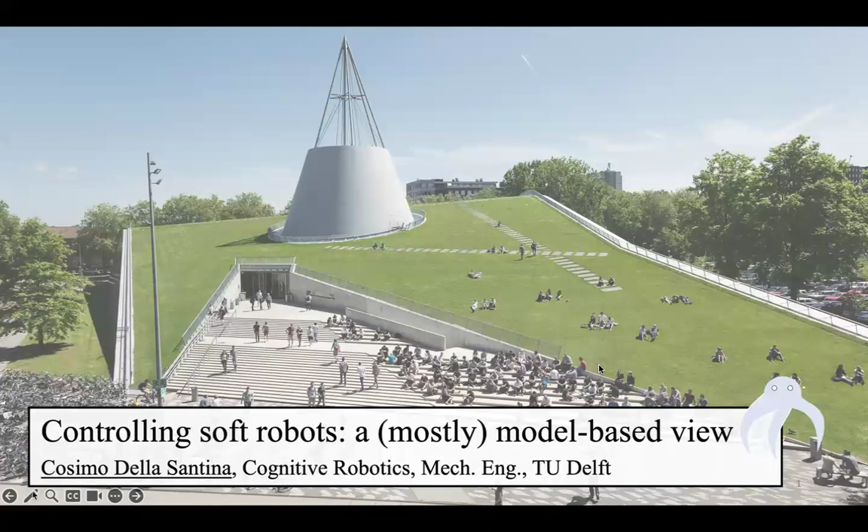This week it is a great pleasure to have with us Professor Cosimo Della Santina, who is an assistant professor at TU Delft and also a guest scientist at the German Aerospace Center, also known as DLR. Something about Cosimo: Cosimo got his PhD in robotics from the University of Pisa, and then he was a visiting PhD student and postdoc at MIT's Computer Science and Artificial Intelligence Lab.

And also he spent some time as a postdoc and a guest lecturer at the Department of Informatics at the Technical University of Munich. Cosimo leads a lab at TU Delft, which focuses on the study of embodied and disembodied intelligence in physical systems. And the emphasis of the group is on elastic and soft robots.

As you've seen from the bio I shared, he has won a number of awards. I will not list all of them. Maybe the most recent is the 2023 IEEE Early Career Award in Robotics and Automation. And he's part of many exciting initiatives in the Netherlands.

Today he's going to talk about controlling soft robots, a mostly model-based view. And I'm very excited to hear more about this subject and to have this subject covered in this Autonomy Talks series. So without further ado, Cosimo, whenever you're ready, go ahead. The stage is yours.

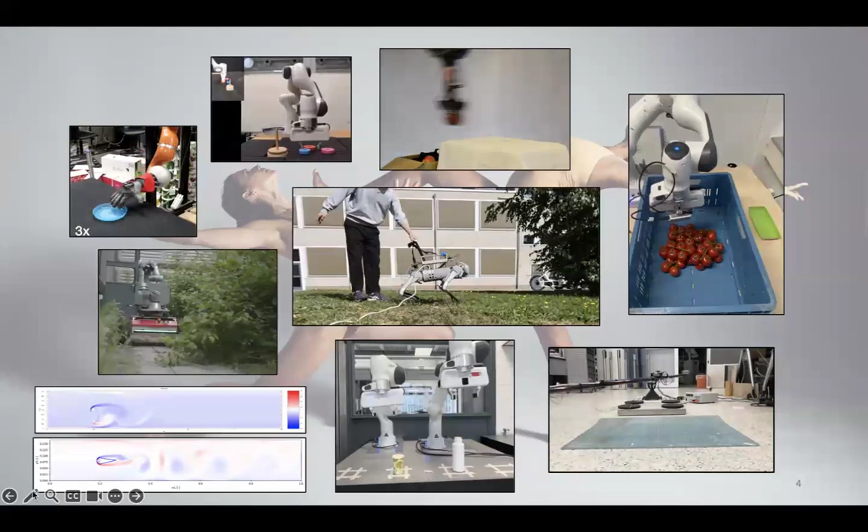they are usually high dimensional, and they have some kind of rich or useful autonomous behavior, autonomous evolution, which is one of the ways you can describe or quantify this idea of embodied intelligence. And in terms of applications, this goes all over the spectrum, more or less. These are some videos taken more or less randomly from works that we do. This one has not started. Yes, that I will not be showing today.

In terms of application, indeed, our activities cluster around these three macro topics: robotic hands, grasping and manipulation, soft robotics, and elastic and soft quadrupeds and efficient locomotion. And today I'm going to talk mostly about soft robotics.

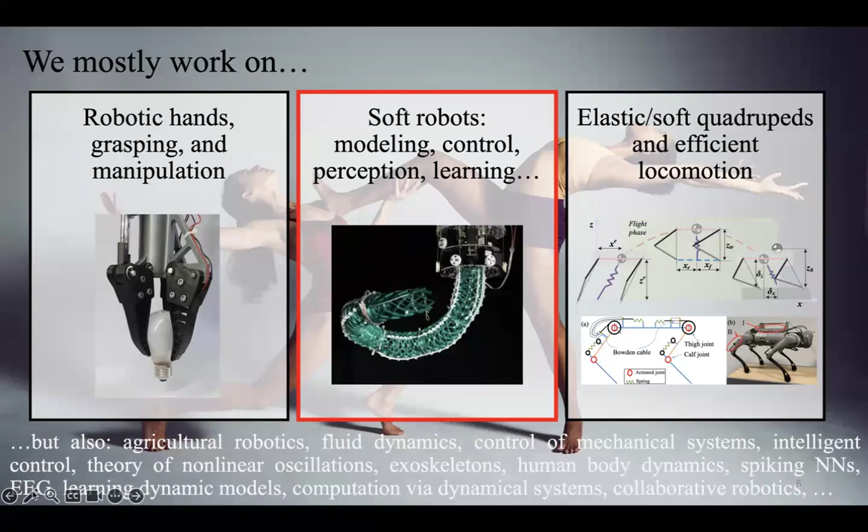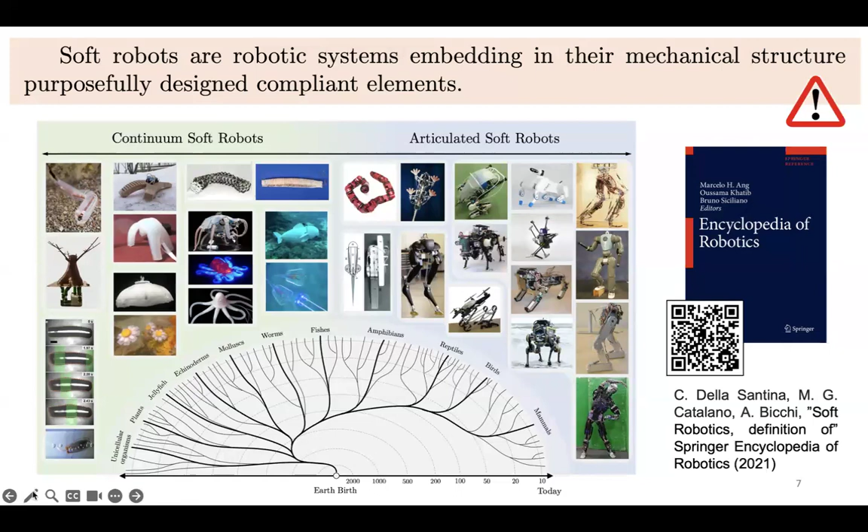And what soft robotics means is kind of a debated topic. This is a definition that I gave together with Manuel Catalano and Antonio Bicchi. So since I gave it, it is the one that I like the most, or at least I liked it at the time in which I gave it.

I will implicitly refer to soft robots as this left half of the spectrum, which is continuum soft robots. And these are robots inspired mostly by invertebrate animals, whose body is composed to a good extent of continuously deformable materials.

And over the years it has been quite an active research area. This is a topic that has its roots in the 80s, but it had quite a steep increase of interest in the past, let's say, 10 years, with a lot of hardware platforms being developed, and you can see just some random collection of them here, mostly from others' labs.

And the goal in all these cases is to hopefully get closer to the kind of intelligence which is most common in nature. So, as we all know, robots have been for many years much more precise than humans or other animals in performing tasks, but still animals are more robust in interactions, safer, and compliant. They can be both precise and compliant.

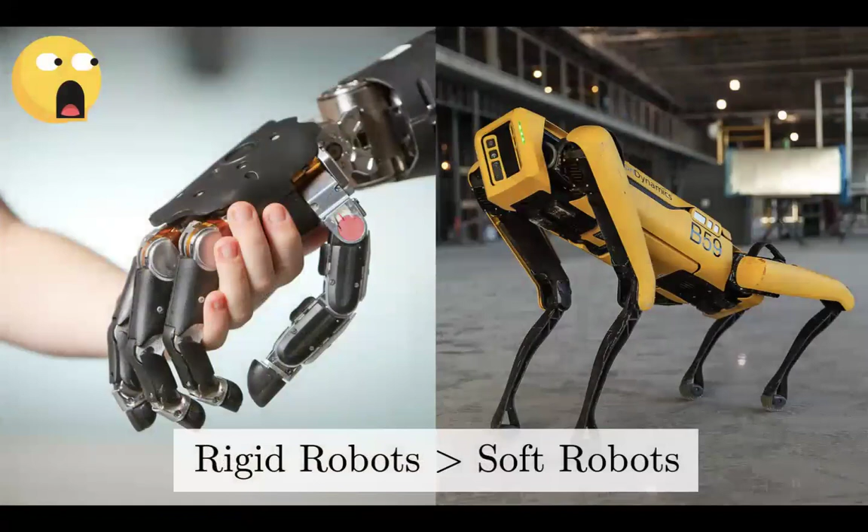So for interaction tasks, robustness, inspection tasks, soft robots should be the way to go. But if you look at what happens in reality, for several reasons rigid robots still outperform soft robots in the very tasks for which soft robots have been developed. So interaction and inspection.

And there are many reasons for that. Everyone has their favorite reason. My favorite reason is motor intelligence. So the lack of an efficient and effective enough low-level brain for this kind of artificial creature, some way of making sense of their own bodies and controlling them to perform actions.

So we look into this with our group, and I will briefly discuss our general view on the topic. But before starting to lay it down, I want to clarify that the way in which we look at this is really a kind of very classical, in a sense, control theory point of view.

So we really started from the theoretical foundation, then tried to build new algorithms upon them, and then in the end new functionalities upon them to really give soft robots intelligence. And now I finally have videos of experiments to show, but this came only after a few years of intense research, more on the theoretical side.

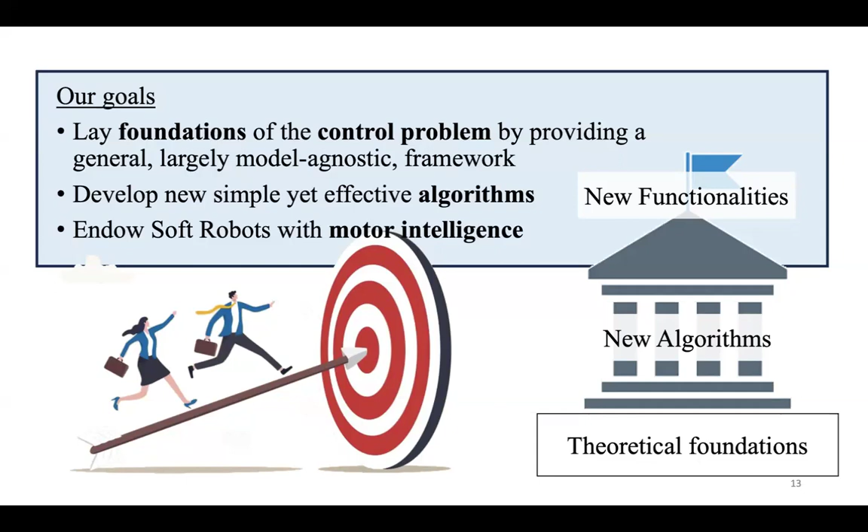Myself, I'm not an expert in modeling, and I will not say that our core expertise is modeling. But what I find particularly interesting is trying to figure out the structures of these models. So not necessarily come up with the most accurate models, but really dig into their mathematical structure and understand what the commonalities are among all the different already existing techniques to discretize these systems.

So why is modeling hard? It's hard for several reasons, but there is a core fundamental reason: if you have a soft robot like the one that you see in this video, and you want to just tell where the robot is at a given instant, you need at least to specify a complete function, the spatial curve that defines the position and orientation of each point of the backbone of this robot.

So this is a function that evolves in time. This means that, at least in theory, you should be using a partial differential equation to model this system, which is very hard to deal with. And this is something that we don't like, especially from the control point of view, since the theory on them is relatively limited.

So what we like the most is to do some kind of space discretization, done in such a way that you end up with ordinary differential equations in a structure that we are used to play with as people working on control of mechanical systems or robots.

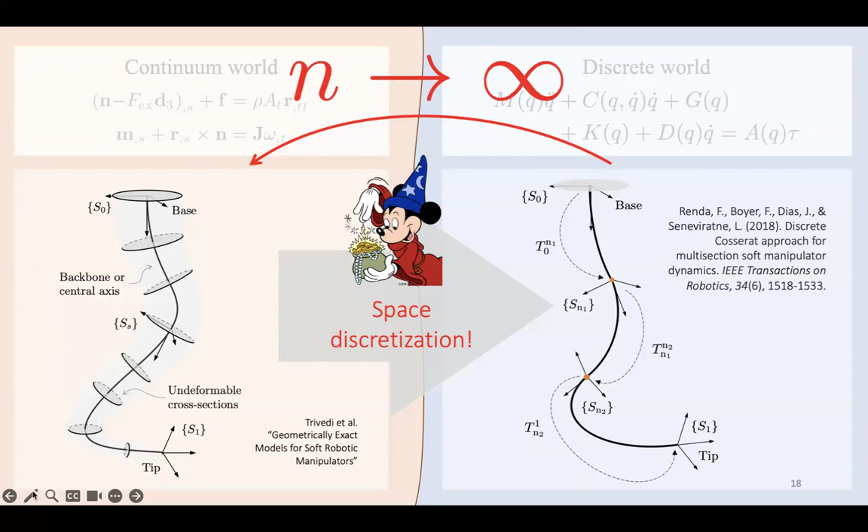And the key point of this space discretization should be that if you take the order of this discretization to infinity, making it infinitely fine, then you should recover the original system, because in this way you get at least some kind of weak proof of convergence on the original infinite dimensional case, if you prove things on the finite dimensional case.

So, control-oriented models, derivation in a tiny nutshell. What are these kinds of models? In the end, coming up with such models can be, to the bone, described in 2 steps. The first one, which is a key step, is to define your knobs. Let's consider, for example, the shape of this soft robot, which is this thing here.

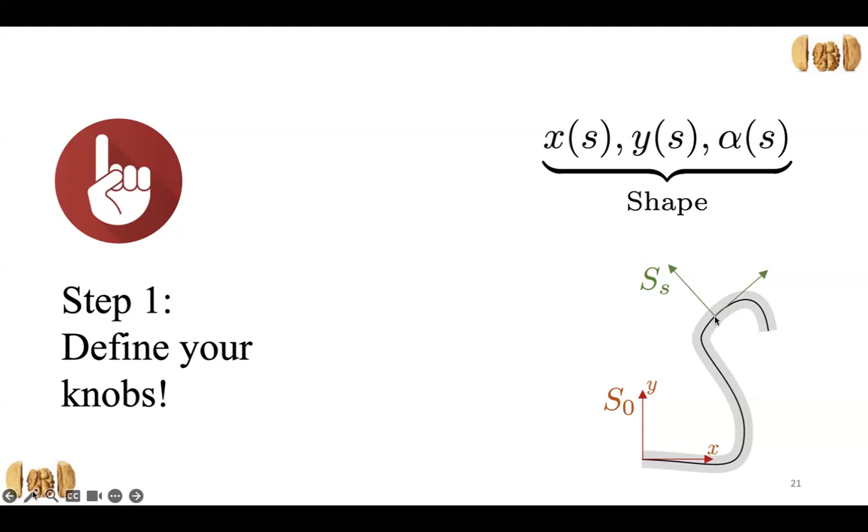Already if the soft robot is forced to move on a plane, so 2-dimensional space, you have a function whose domain is 0 to 1, because this is the local coordinate. And then for each point S, you have to specify X, Y, and alpha, the whole position and orientation of each point. So these are 3 functions that specify the shape of this thing.

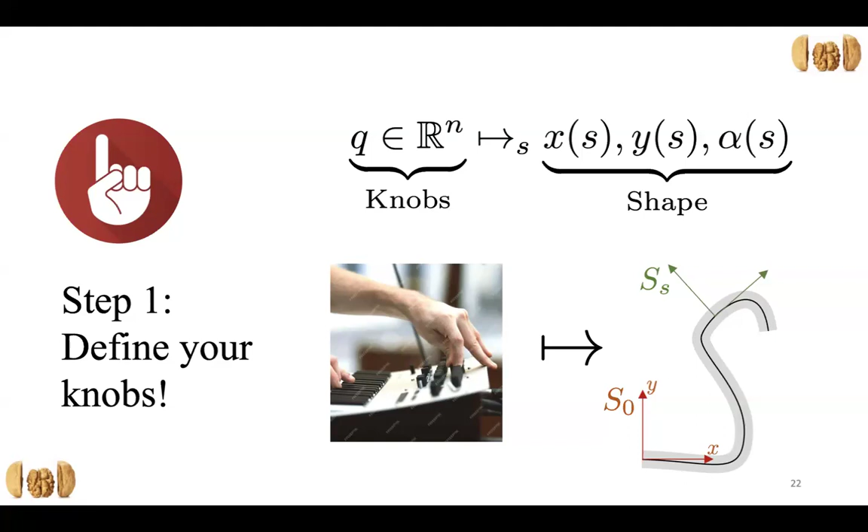What you need to do is to come up with a mapping between a finite dimensional amount of variables that you move, and if you move these variables, this will define movements in infinite dimensional shapes. And this is really where all the art is. Defining this kind of forward kinematics is the art, because it's where the expert intuition enters. And I will show in a second a few examples of these.

But once you have these knobs, you have ways in which your robot can move, and associated movement of mass, and then you can just use a, quote-unquote, standard Lagrangian machinery to come up with your ordinary differential equations. These are going to be equations that describe the evolution in time of these knobs, not of the infinite dimensional system.

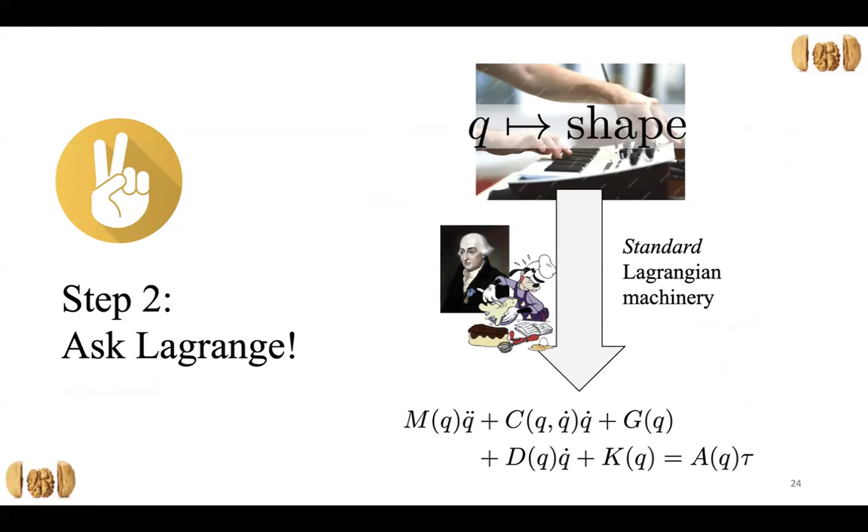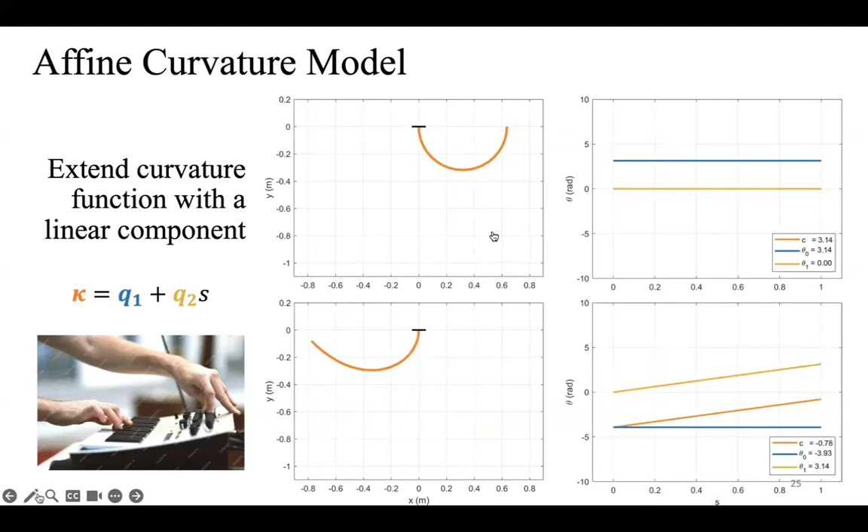And you can see that with just 2 degrees of freedom, you can obtain quite complex shapes. And this one on top, we are keeping Q2 equal to 0. We are changing Q1, and this is called the constant curvature segment. And this kind of constant curvature segment actually is grounded in much more classic ideas, which is called the piecewise constant curvature model.

And here the knobs are again, you are looking at your soft robot as an interconnection of circles with constant length, but with variable curvatures that are variable in time, but constant in space. So each knob is associated to the local curvature, which means the inverse of the radius of each of these local circles here.

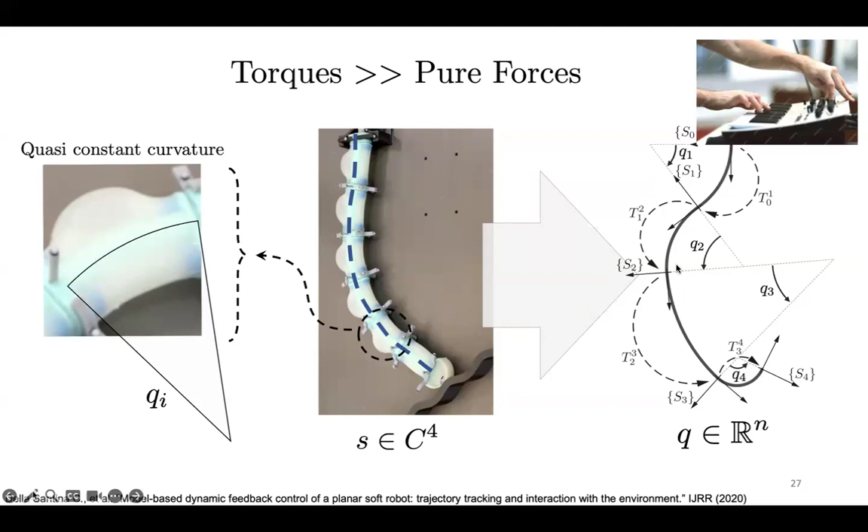And this works particularly well, for some reasons that I will not go into, to describe systems that are made by interconnecting actuators, so soft actuators. You can see it here. The core idea: you have this soft robot, and you can identify parts in which the shape will more or less look like an arc of a circle, and then you just combine these. And again, with each knob, you are going to change this angle here.

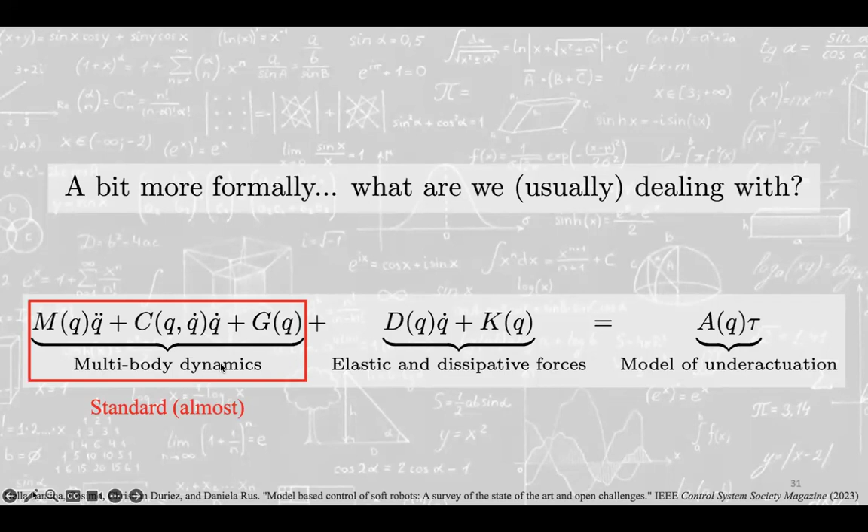So, a bit more formally, since I see it's already 15 minutes that I'm speaking, what we are more usually dealing with are these kinds of ordinary differential equations, where you can identify 3 blocks of terms. One first block is more or less standard. If you have been working on control, or looked into control of a mechanical system in the past, or a classic robotic system, this is what you usually have. What you have inside for a soft robot is different, but the structure of the equation is the same.

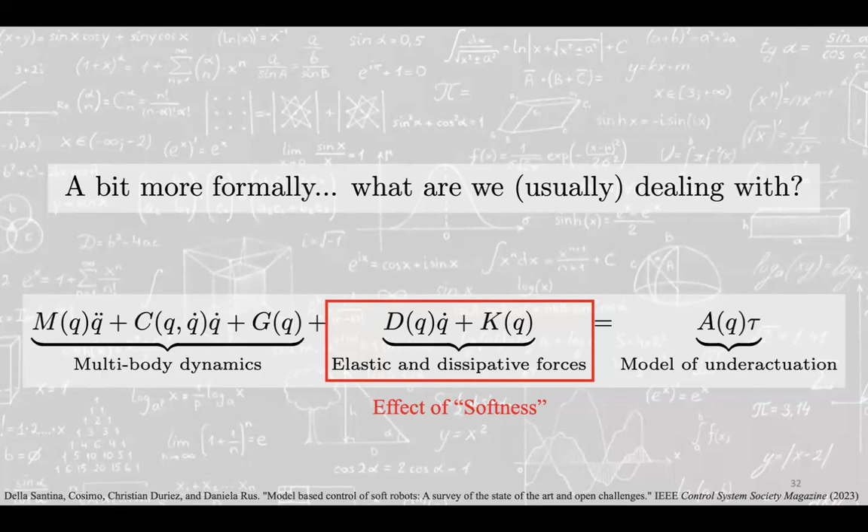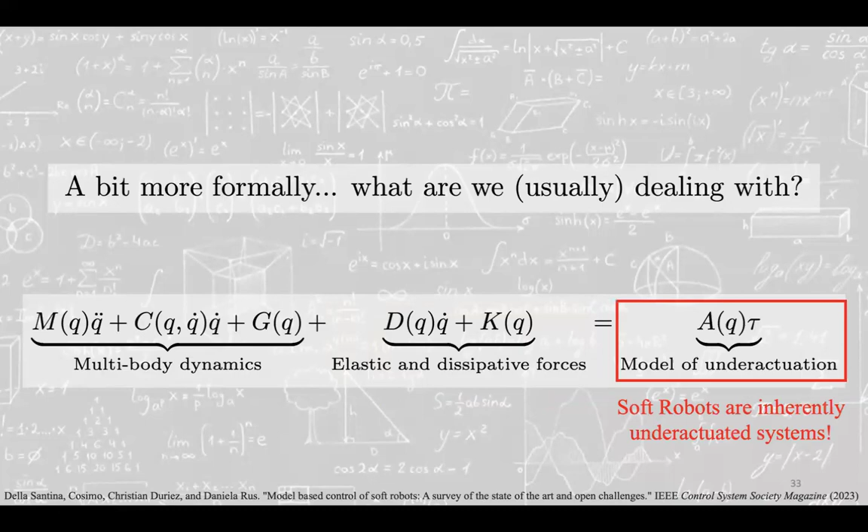And then you have this effect of softness, and this is a dissipative and elastic potential field that permeates all degrees of freedom, regardless of the level of discretization, and ends up acting as a stabilizing effect, which helps you. Then you have this model of under-actuation. So you have to have some way to map your finite amount of degrees of actuation, so of inputs, on the degrees of freedom, and this can be done usually, in most cases, with a matrix.

But then if you start saying, oh, I want a finer approximation, I want this to work a bit better, then what you will end up with is a taller matrix, something like 6x3. And there is no limit to that. You can get it finer, finer, and finer. And in principle, you will get to kind of infinity by 3. So an infinitely long matrix with 3 columns.

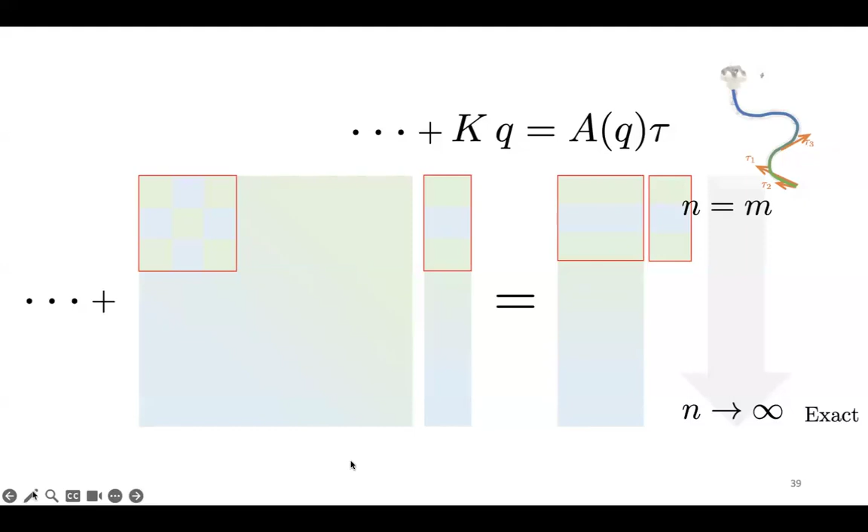And the same holds for all other parts of this dynamics. You have this spectrum, which you go from kind of a fully actuated model, which you have same amount of degrees of freedom and degrees of actuation. And if you bring n to infinity, you will increase the dimension of this vector and the dimension of this K matrix and the dimension of Q, ending up with infinitely big matrices. And this is true for all the matrices and vectors in the dynamics.

So this is nice because it solves the general thing that we need to start talking about motor intelligence from a model-based perspective, which is this kind of model space discretization, which is finite, with a finite amount of degrees of freedom, but that in a sense it's a good representation theoretically of the infinite degrees of freedom case.

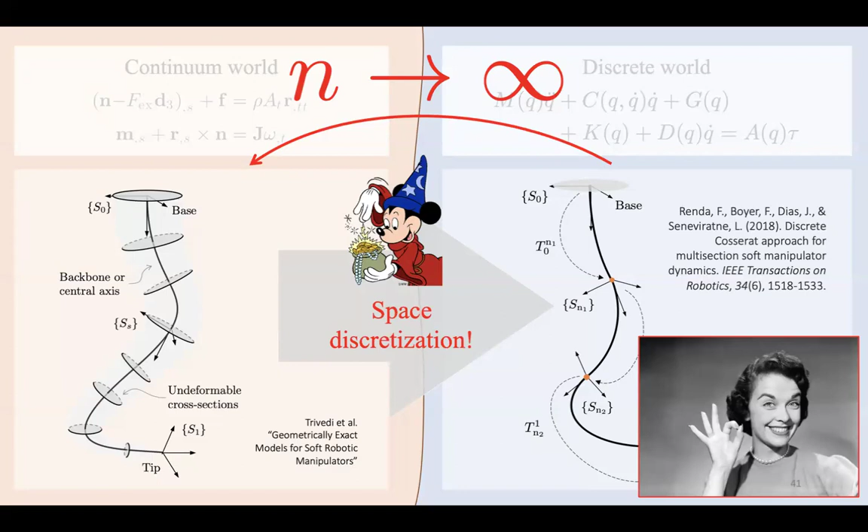But this kind of discretization is not great actually for control. Why is it not great for control? Because you have this full matrix A, and this full matrix tends to end up mixing all the control inputs on all the accelerations, and so it's very hard from the control point of view to disentangle things and end up controlling the system. So, for example, it's not even clear what it means to do collocated control in this context.

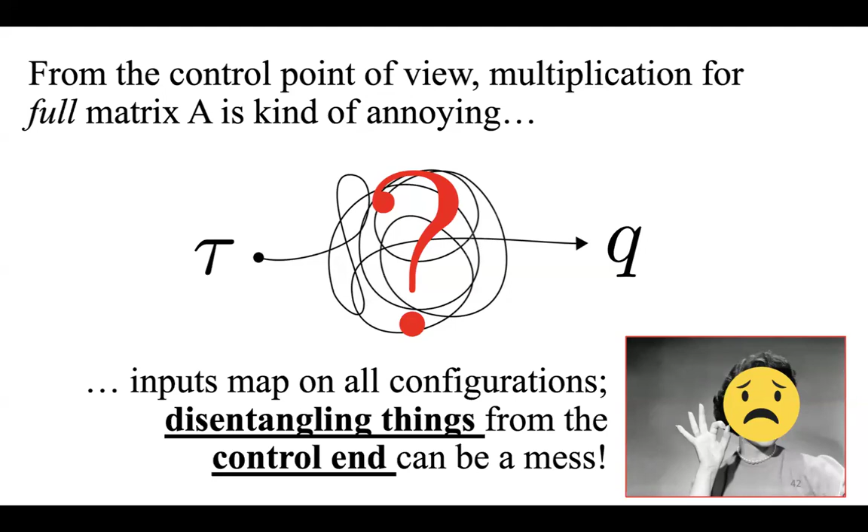So this is where kind of higher level magic enters into play. So before we had the first level, which is discretization. So the fact that you can look at this infinite dimension as a finite dimension. And the higher level actually involves no approximation, and it's a change of coordinates. So it's something that we have been thinking about for a few years, and my guess was always, the answer to this question was always no.

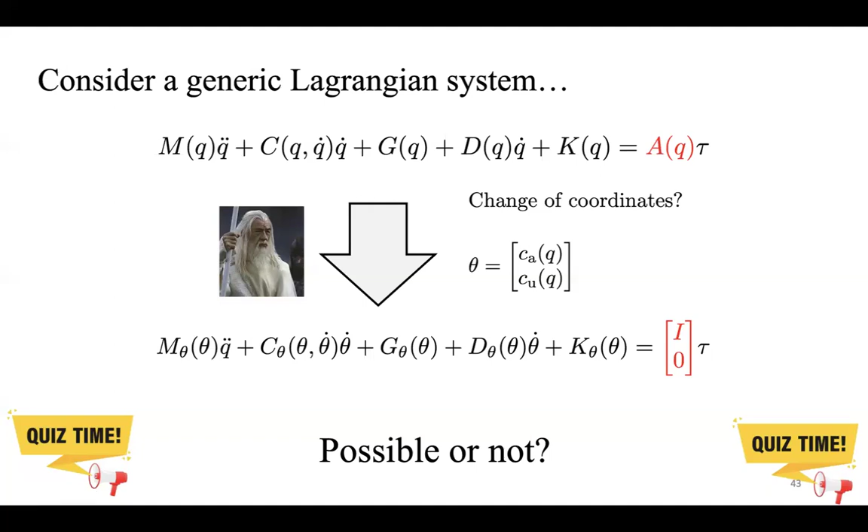And the question is, if you have something like this set of equations and you have this matrix here, which is full, can you just by means of a change of coordinates end up with something like this? So something in which you have a clearly separated set of equations where your actuators are acting and all the others are passive. And this way you have a much more clear connection between the inputs and the actuated coordinates and the unactuated coordinates. But the answer is yes, and maybe a quite technical request, but anyway, it's an if and only if. We're very happy about it.

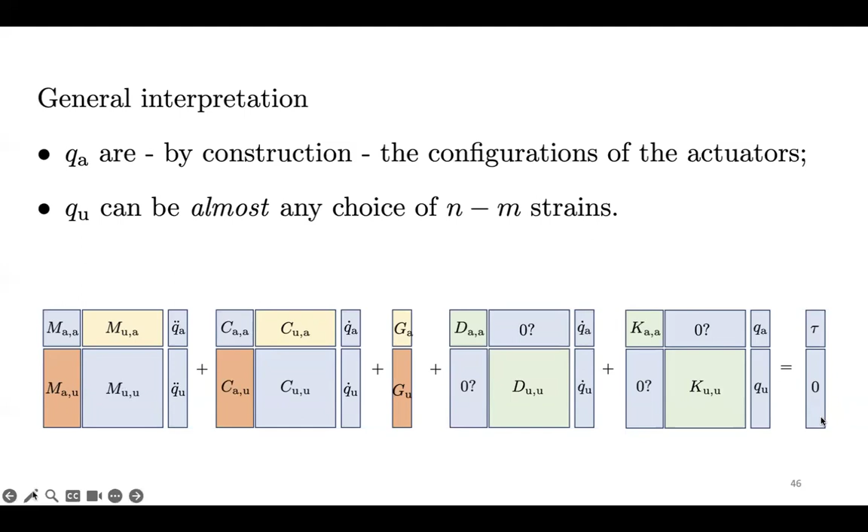These are the equations we end up with, and we call these actuation coordinates or collocated coordinates because you can give a very clear interpretation to Q of A, and these are the configuration of the actuators. And I will provide an example in a second. And for all these others, you can just take n minus m variables from your original body coordinates, and it will work. But now you will have this very nice structure of your equations.

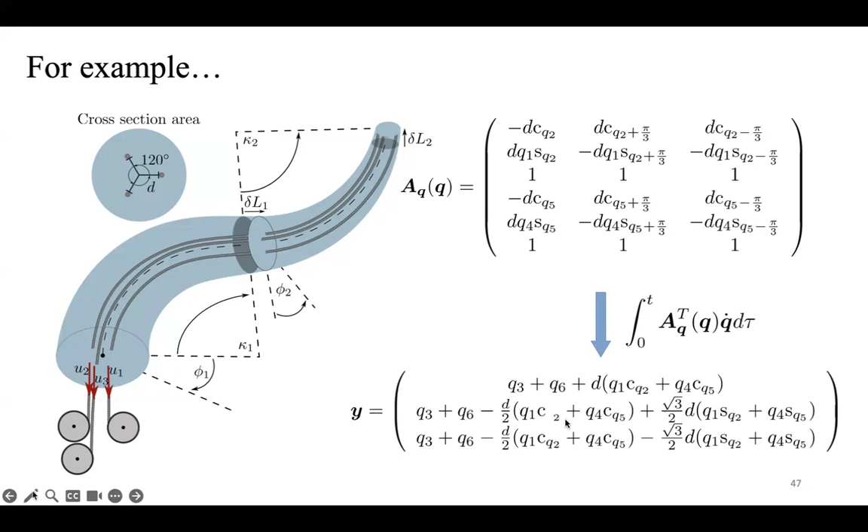So an example is available here. You have your tendon-driven soft robot. So this is your soft robot. You have 3 tendons, and this is the input matrix. You just have to believe me that this is this nasty one. And if you integrate, you can solve this in closed form for Q1 and Q2. You get, again, this very nasty thing. But what is important is that these three variables are going to be the actuated coordinates of your system. And these are exactly the tendon displacements along the robot, or alternatively, the scaled angle of the three motors.

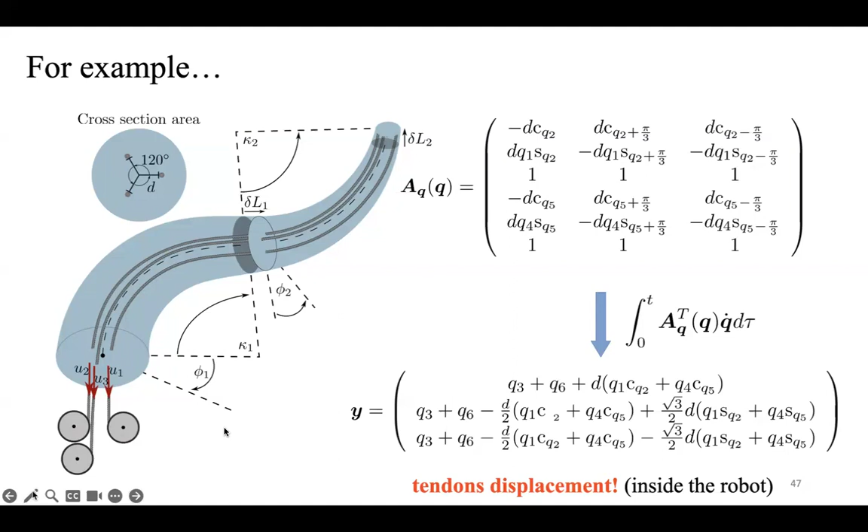And this is described in this paper. Again, it's an if and only if. It's been very recently accepted by TRO. So just take a look if you're interested in the nitty-gritty. But this is the final picture in which we are, at least at the moment.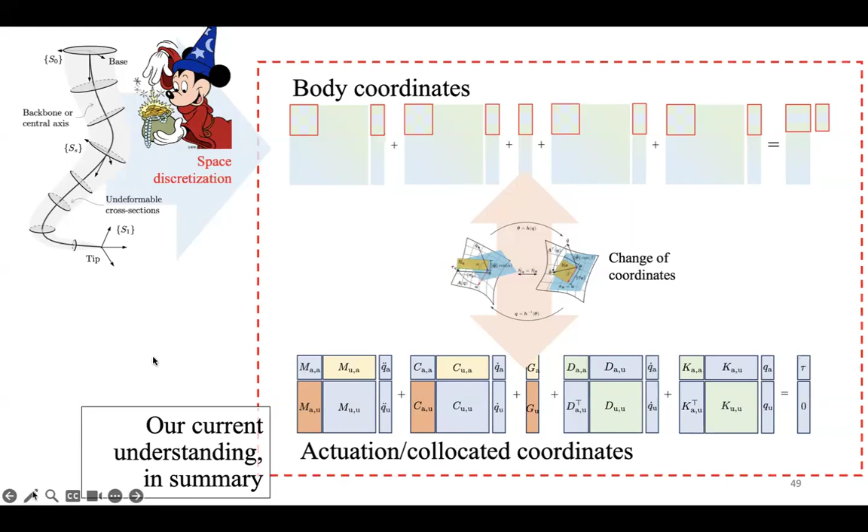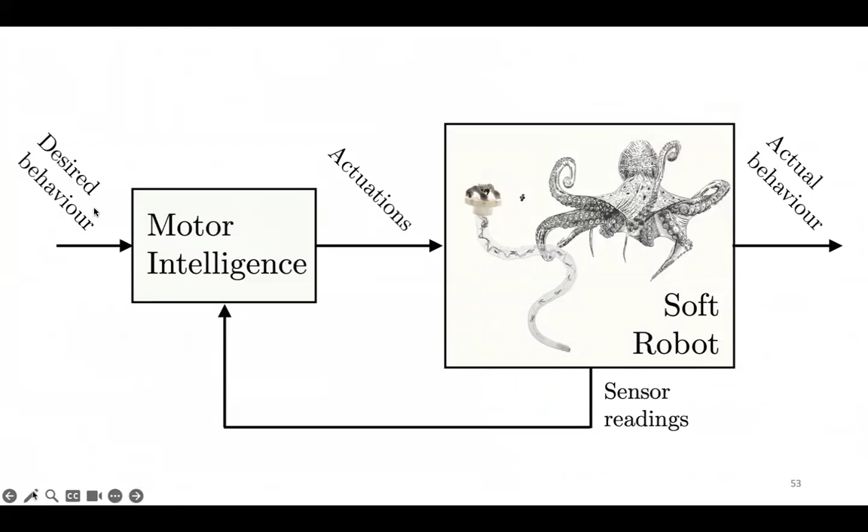So we are happy here, and we can move to probably more interesting things, which are what you actually do with these things, so how you use them for control. And this is an example. You want to have some kind of motor intelligence. You have your actuators, you have a set of sensors. You have a desired behavior, you want to impose it on the system.

And the simplest kind of control problem that you can think of is shape regulation. So you have this reduced amount of actuators. We assume full state information. You have a desired shape, Q bar, and you want to close the loop so to obtain that desired shape on the soft robot.

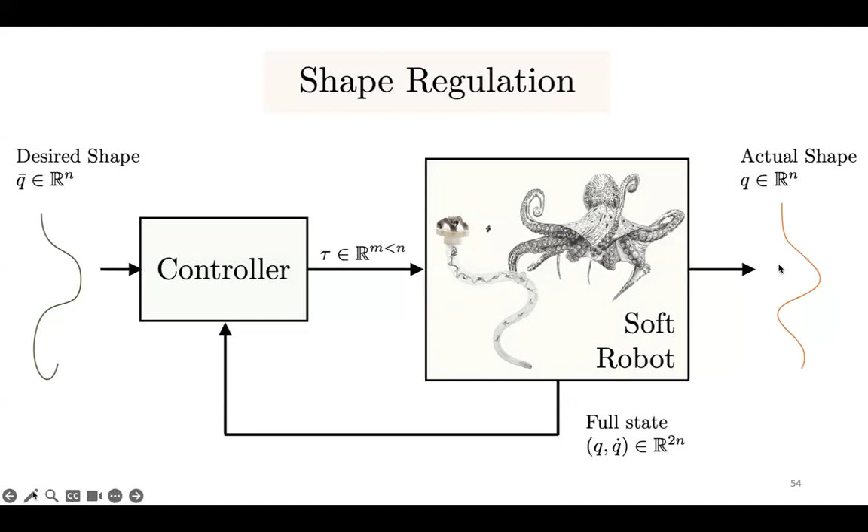And hidden behind all the things that I'm going to show, at least in the experiments, there is the fact that you have to come up with some kind of shape selection, which is another place where the model is extremely important, but I will not have time to discuss that. So you have to select somehow a shape that is an attainable shape, that can indeed be obtained, and that fulfills your goals. So let me skip this.

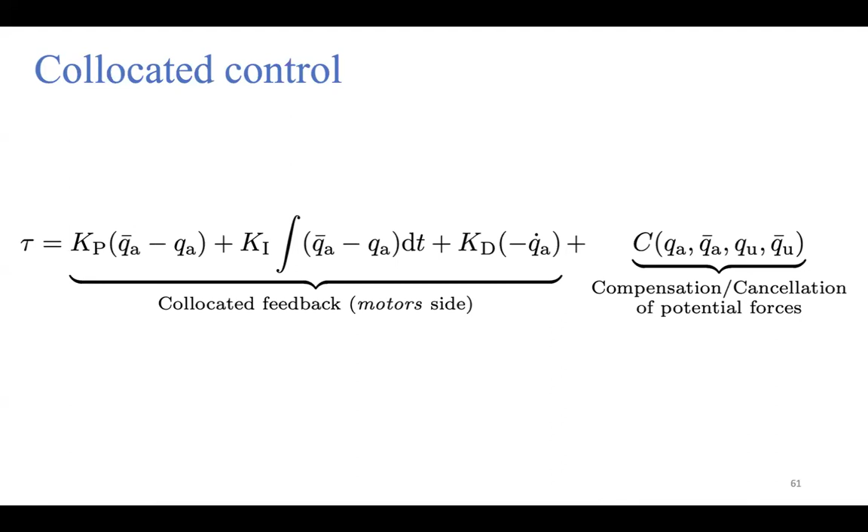Collocated control, what does it look like? Of course, we have also looked into the more usual things like feedback linearization, things like that. But in order to make it work on a real system, you have to come and think of something which is, in my opinion, simpler. And this is usually more complex to design from a fundamental point of view. This is a good general description of the kind of controllers that we have developed. One is a PID that closes the loop on the collocated coordinates. So this is a PID on the motor side.

And this is indeed what people have been doing for the last 10 years. People that didn't care about the model, just wanted to show off the robot moving, were just closing a loop on the motor side. And for a few years I have been saying this is bullshit, you should not do it, you should control on the body coordinates, but then I realized that it was actually quite a good idea. Took me some time, but this is a PID that people have been doing even before.

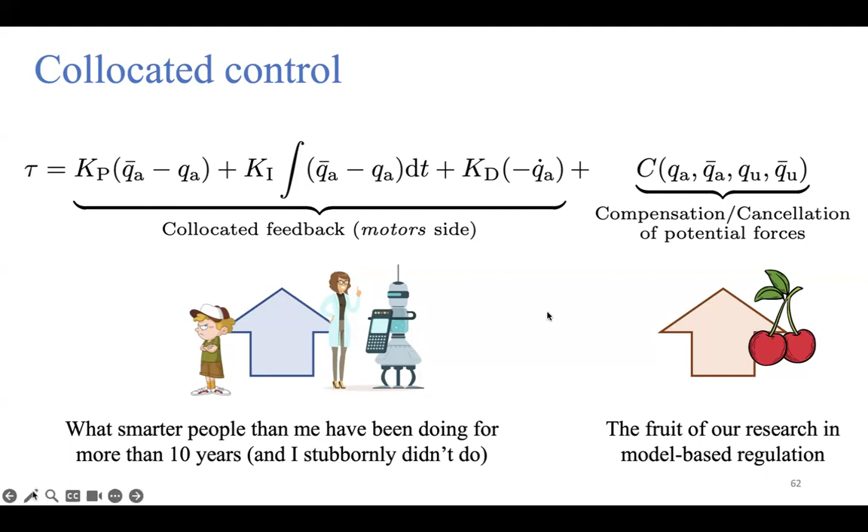And instead, what we propose in the end is to add this extra loop, which explicitly accounts for the effect of unactuated dynamics. So this is an example of such a controller: for example, a PD with feed-forward compensation of the elastic term and feedback compensation of gravity.

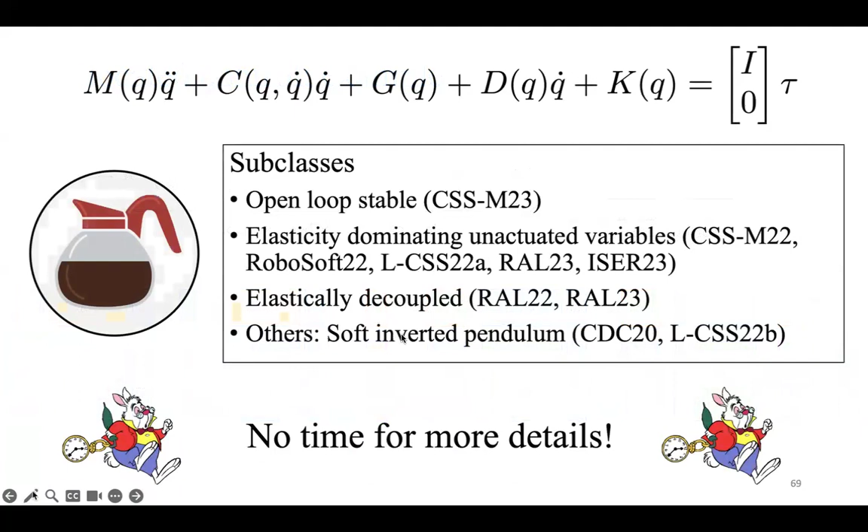And the trick to prove these things is usually to rewrite the closed loop in such a way that you end up using the physical dissipation and the physical elasticity of your system as a stabilizing effect, as I was mentioning before. And then you have to show that this is strong enough to survive against the destabilizing effect of gravity. And we have, as mentioned, variations. We don't have time to go into them.

What is more relevant is to see if these variations actually work, so to have some nice reality check. And this is a part that I'm happy to have, because not long ago I would have stopped my talk here, which would have been better for time, but not for my personal happiness. So now we are at the point at which we can bring these algorithms onto real systems and show if they work.

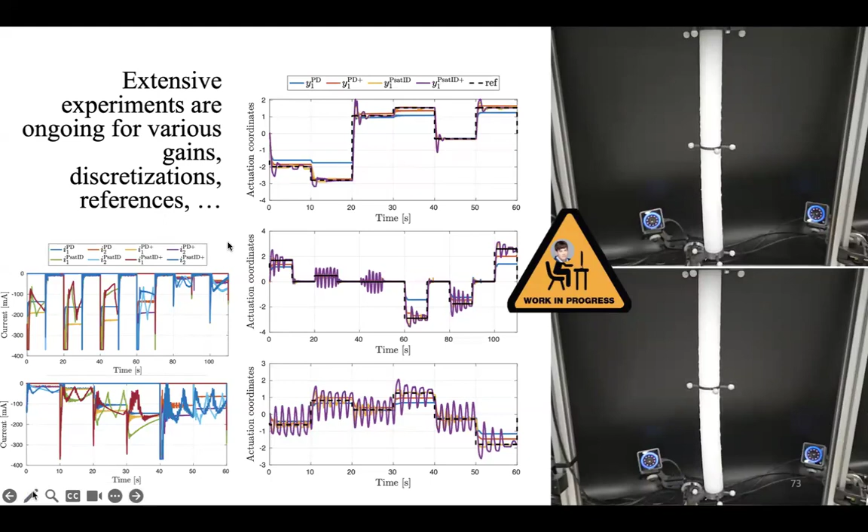And Pietro is downstairs at the moment performing literally tons of experiments. They have been ongoing for weeks now, where you just test these controllers, and we're actually going for even more of them in a lot of different trajectories or step responses. So I don't have a global or final result of this, but there are already some interesting trends that come up.

So one is the performance of these controllers with respect to the level of discretization, the kind of discretization. What seems to quite clearly arise is that even for such a very simple system, you have to take into account the underactuated dynamics, the underactuated part. So if you use just 1 degree of freedom for 1 actuator, you get almost 1 order of magnitude more error.

At the same time, it appears that, again, for such a simple system, there is not much benefit in increasing the order of discretization. So 2 degrees of freedom are actually enough, and there is also not much benefit in using smarter discretization techniques.

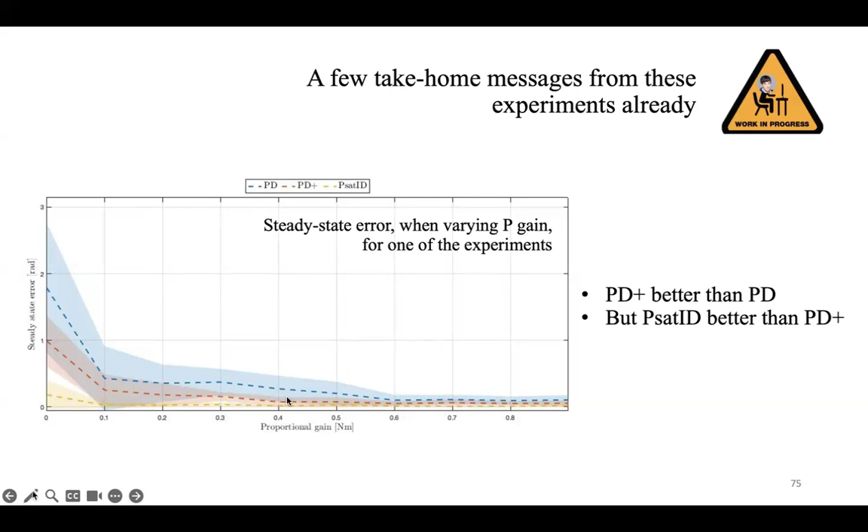So this is instead a comparison of steady state error for vanilla PD, vanilla PID in a sense, and then a PD plus, so a PD with this regulation term, for different proportional gains. As you expect, in terms of steady state behavior, the PID works better, but the PD plus works, I think, reasonably well too; even with a relatively small gain, you already get comparable performance and much better than a PD.

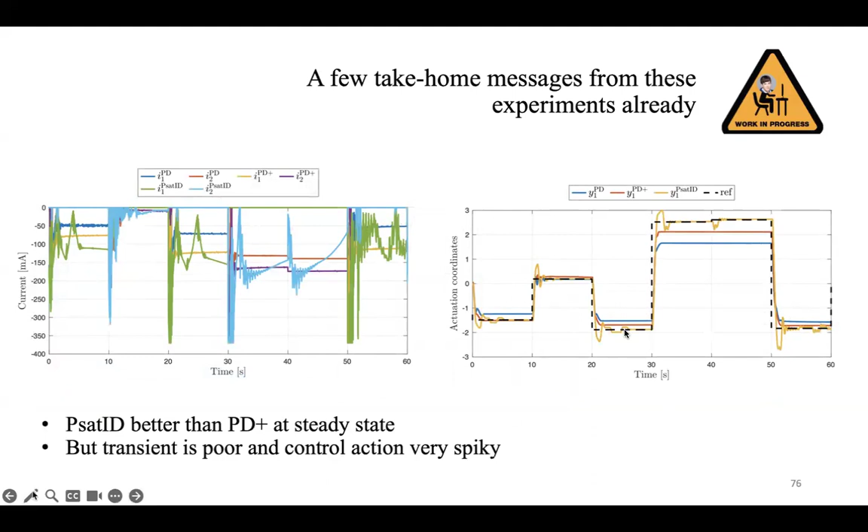But in my opinion, more interesting is that if you start to look into the control actions and the transient, you see that even if the steady state looks nice, the control actions of the integral one, these blue ones, and the transient, these yellow ones, are quite bad. So for now, according to preliminary analysis, probably with some cherry picking, the PD with the model-based term works better than the model-free alternatives. More to come.

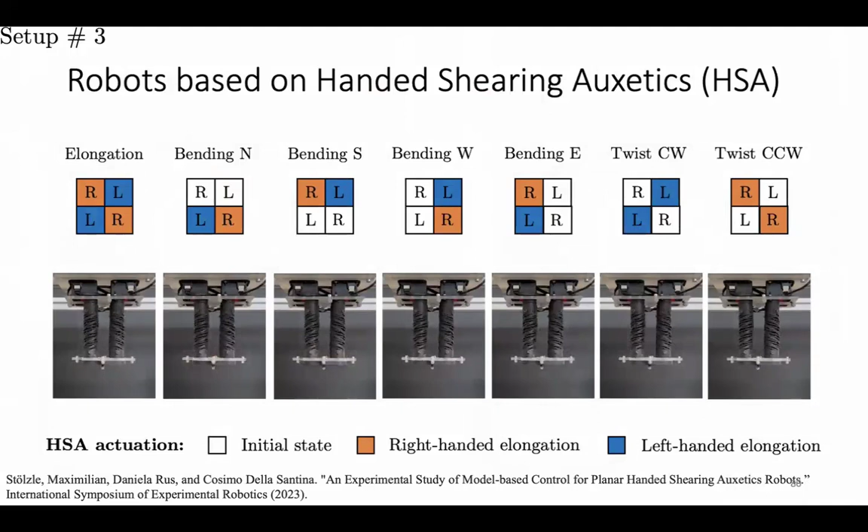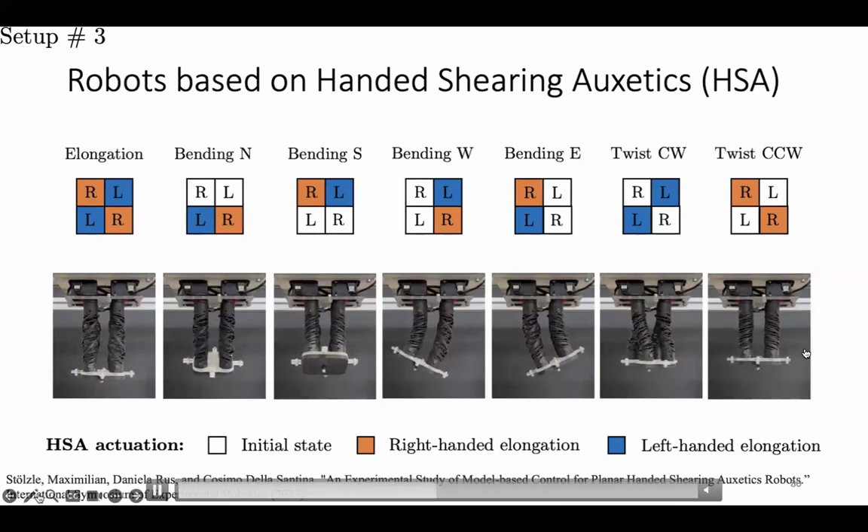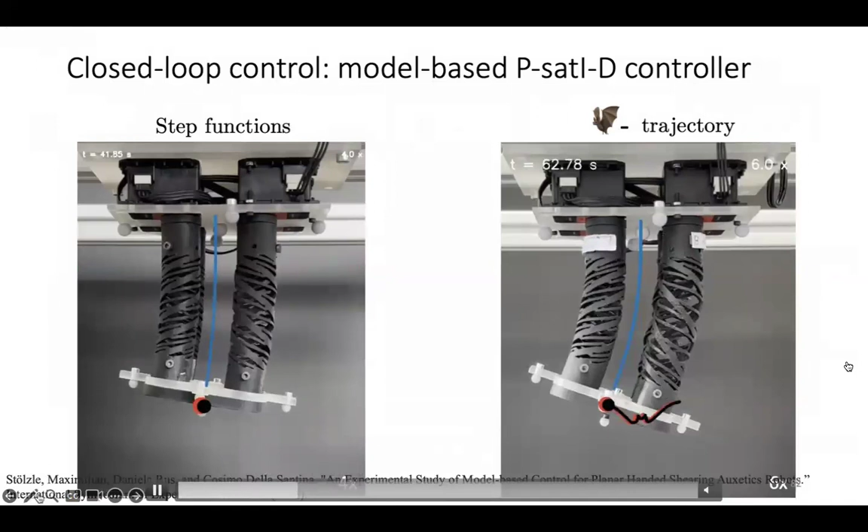And this is other work from Maximilian, who is here, I think. He looks into closing the loop on this very fancy and nice robot that people in Daniela's group developed, Ryan Truby, Jeff Lipton, and Lillian Chin, and this is based on metamaterials. The inputs are the control actions of these motors, and this is the setup; we'll just quickly go through that. But what I think is nice is the level of precision you can get even with such a complex robot. You are able to track these bats quite precisely.

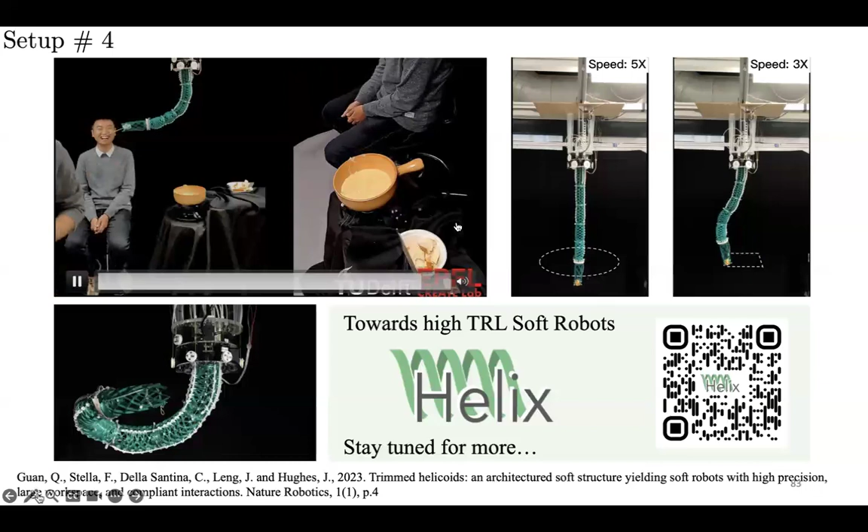And this is yet another recent result. It's called Helix, and this actually goes beyond the control part. It is a new robot that we have been developing together with Josie Hughes and Francesco Stella at EPFL, and Francesco is thinking of building a company out of it. So if you want to know more, just follow this QR code here. But again, you can see how using these advanced controllers we have developed, you can end up performing tasks while maintaining the compliance of the robot and being very precise.

This is about shape regulation. I had a whole section beyond regulation, for trajectory tracking, but I think I will just completely skip it, because I really want to show the final part, and the time is already up. So yeah, for the soft robotic part, we have seen some examples of nice things.

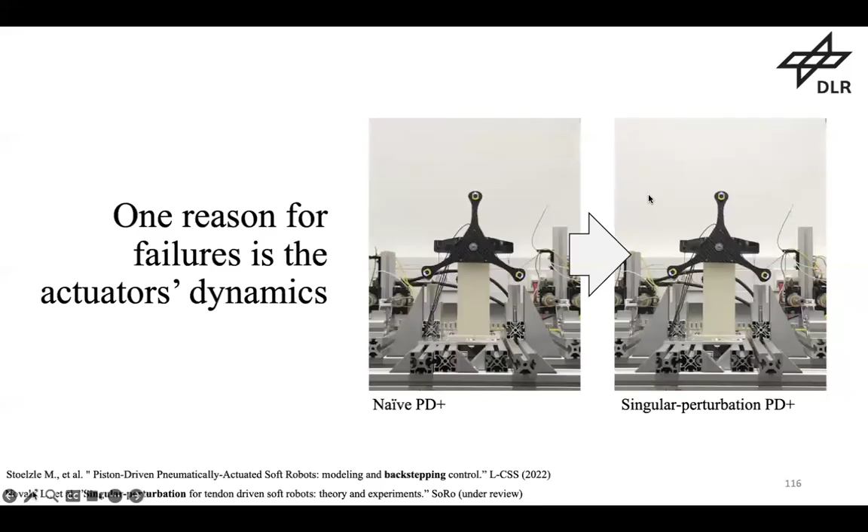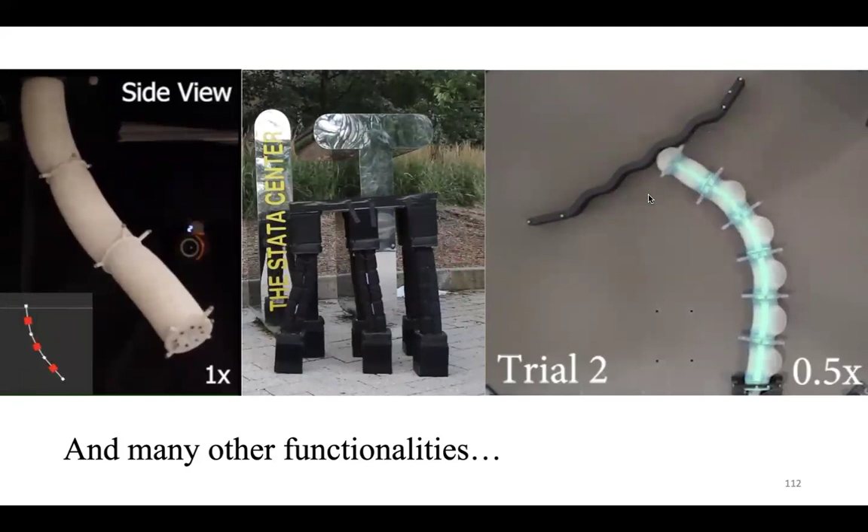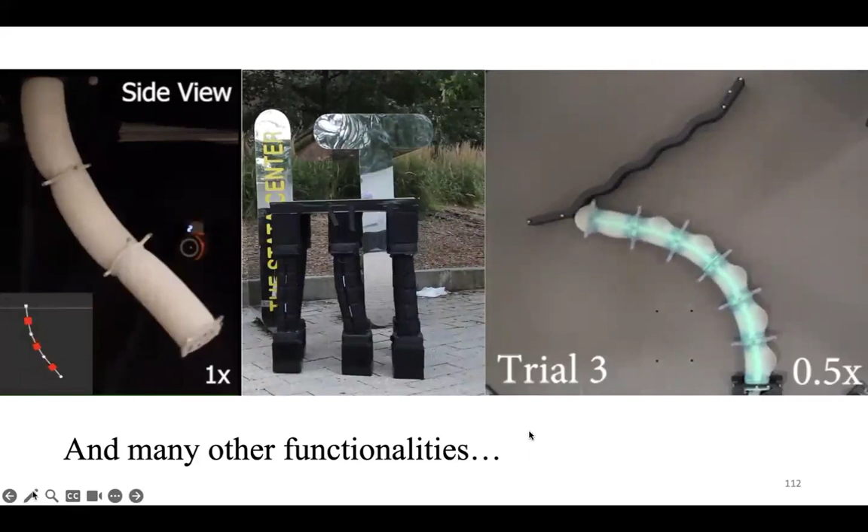I just want to show a few videos on this part to motivate you. We have realistic, maybe not realistic, but validation of controlling and giving motor intelligence to these complex systems, but there is really a lot still to do to get reliable performance. In practice, you sometimes end up with unstable or reduced performance behavior, and this really needs further theoretical investigation on one hand, and more and more real-world applications on the other.

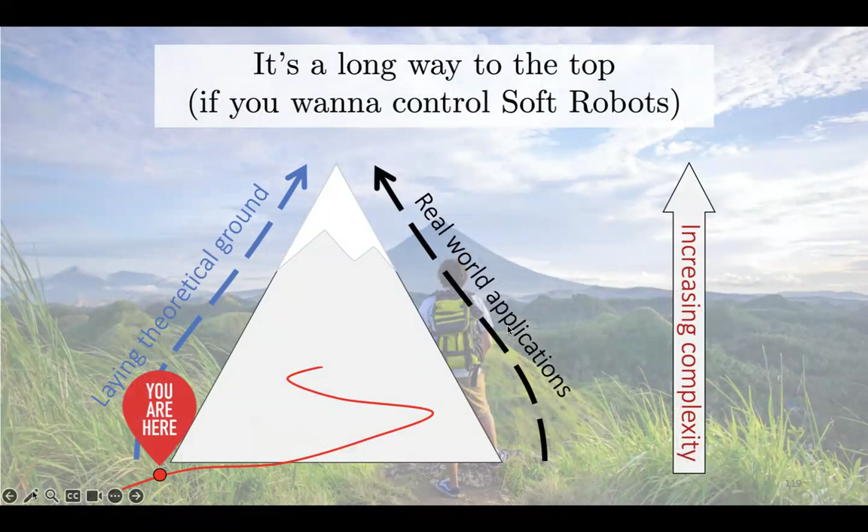Many of these things are discussed in this tutorial/review paper that we have written together with Christian and Daniela, and it appears in the Control Systems Society magazine in a special issue on soft robotics that Helmut Hauser organized.

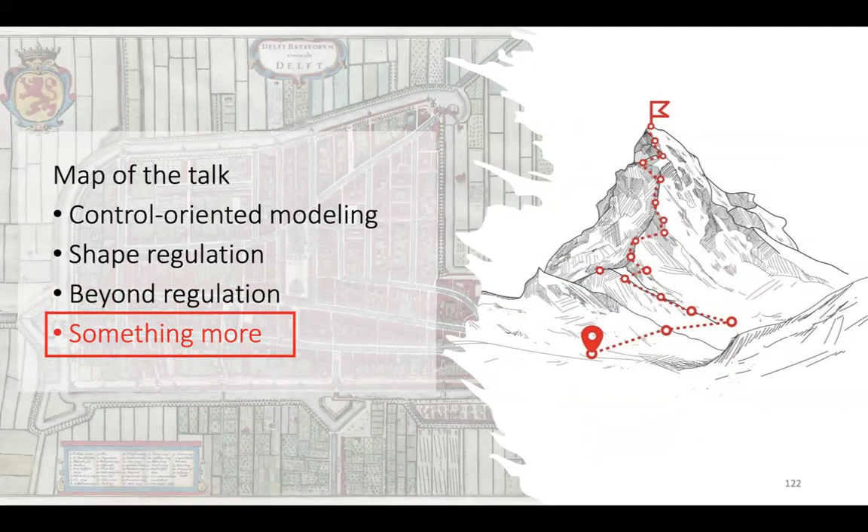So I think we try to write it as a kind of a tutorial paper for this model-based view to the problem. And I want to conclude with some outlook to something beyond shape regulation and shape tracking, and two points in particular. So one is about machine learning.

So usually when I end up talking for 1.5 hours about models and model-based control, one question that I always receive is why not just use machine learning? Why bother going through all this trouble if we are seeing that directly learning works very well? And I am all in favor of using machine learning. I do that for other systems in other contexts, but in this context,

I think one direction I'm very excited about is recognizing that models do not need to be first principle models. So models could be learned as long as they are learned properly. And this is work that we have recently done, published less than a month ago, I believe. And the idea is to learn from data a dynamic model which has the structure that we know is going to be the structure of the real system.

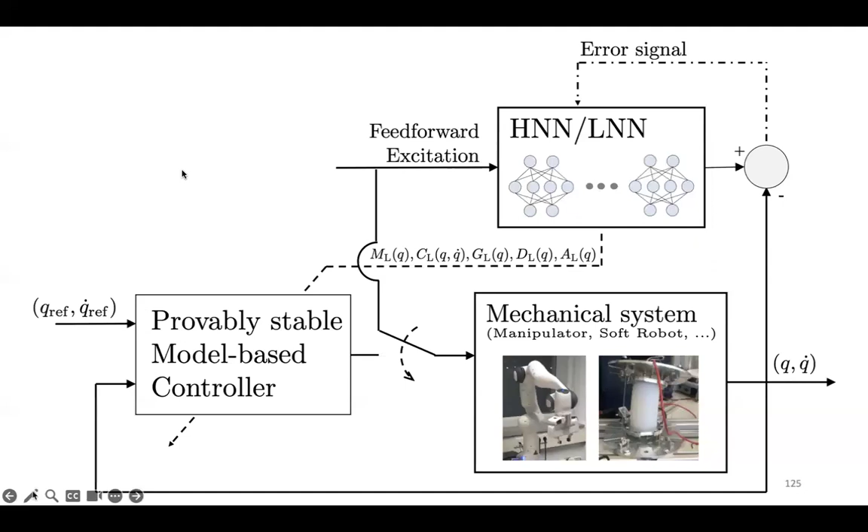So again, we come back to the fact that it's not really important how you end up with that model, as long as you understand what structural properties it needs to have. And then you deploy this learned model on a provably stable model-based controller, which is developed using the theories that I discussed before. So we use a Lagrangian or a Hamiltonian neural network, a bit modified to work on soft robots. And we have validation on soft robots.

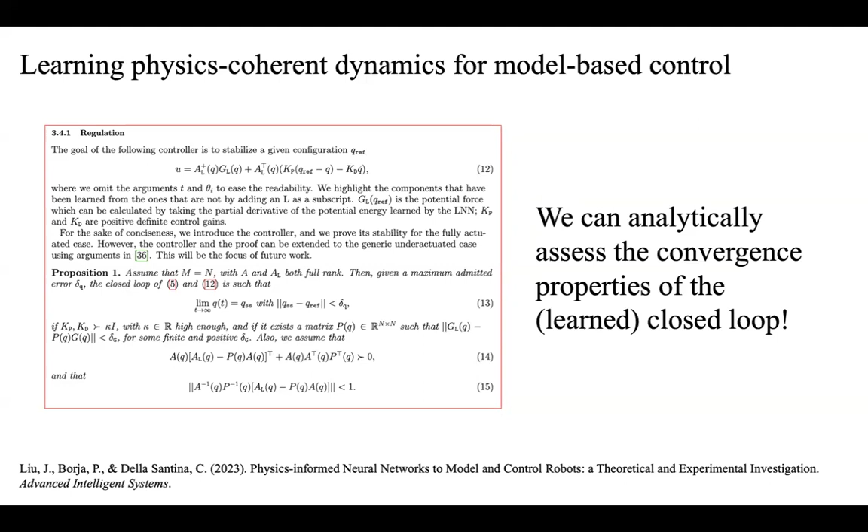You can see here. But the thing that excites me the most about this is not just that it works, but also the fact that you can really give guarantees at this point. So you can start plugging the control based on the learned model into the real model, in a sense, and start to reason on the stability of the closed loop in presence of not perfect learning. And again, the performance is pretty good.

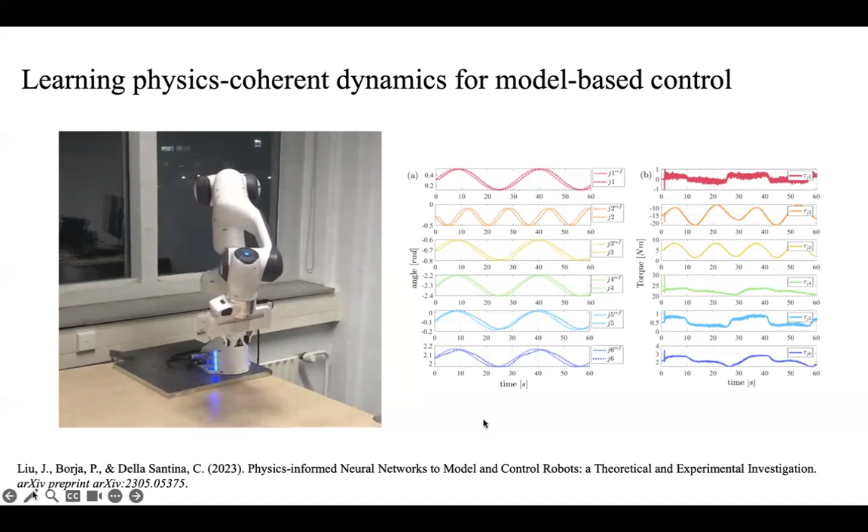This is not a soft robot, but I think it was an important validation, because we are using it to replace the low-level control of the Franka Panda robot, and we get comparable performance to the one that engineers came up with, I guess, working a lot on it, and we can directly get it using this pipeline.

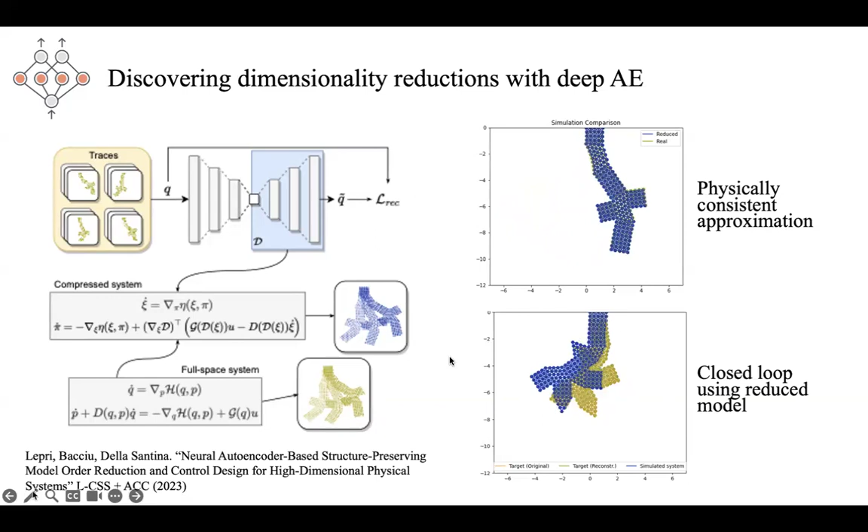So this is one end. Models do not need to be first principle models. But another thing that we are looking into is the fact that soft robots do not need to be soft robots. And what this means is that you can take something like this classic robotic manipulator, and one reasonable task to solve with this manipulator is to manipulate deformable objects with non-negligible dynamic response. And this is actually not what most model-based solutions in manipulation of deformable objects have looked into.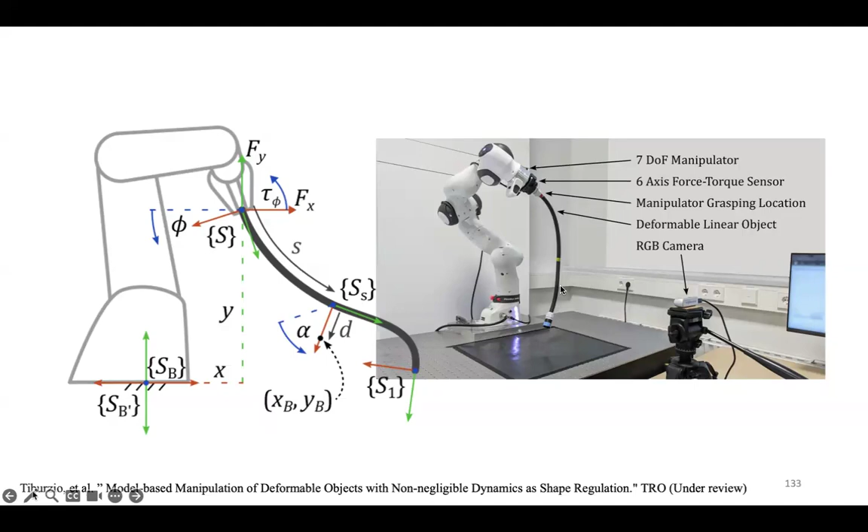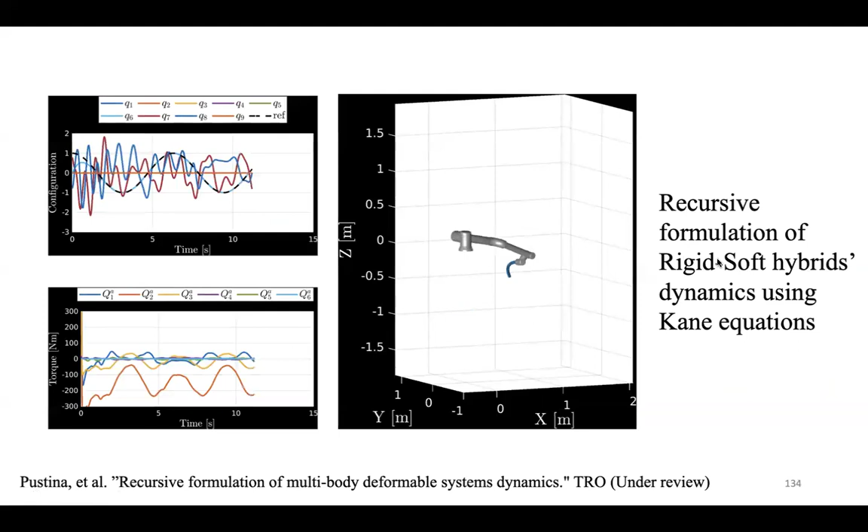But I think it's a very interesting use case, and this, for example, comes from a collaboration that we have with a company. This is a heavy electric cable for recharging electric cars. This is more evident in this simulation. You can see this as a kind of hybrid soft-rigid robot, where you have the soft robot, which is completely passive, and it's the object, and the rigid part, which is instead active. And you can apply, as it is, all the theory that we have discussed so far to this new context.

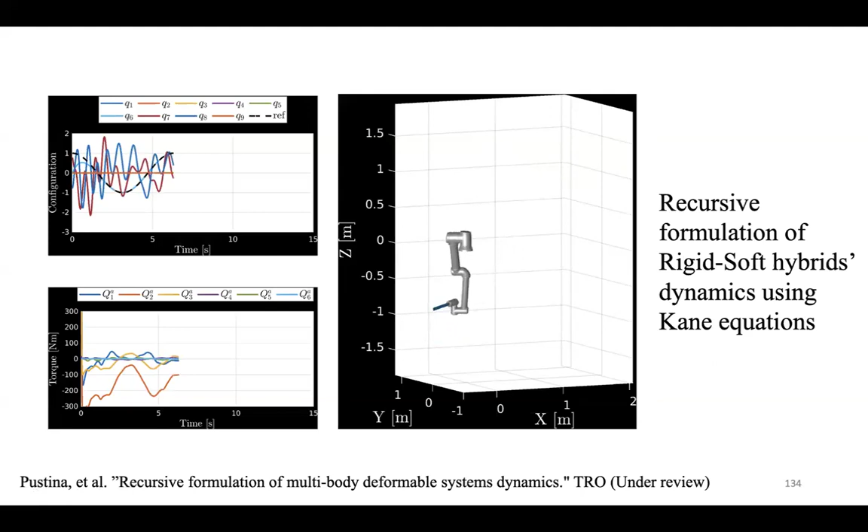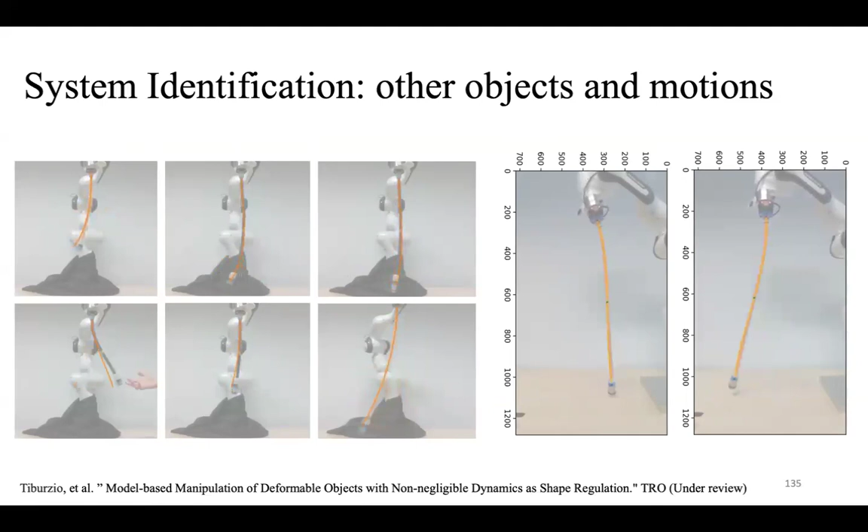Yeah, first of all, for modeling. So this is the result of the system identification, where you see the model prediction overlaid on the actual behavior of the system, on the soft part of the system. But then you can use it for closing the loop, for control.

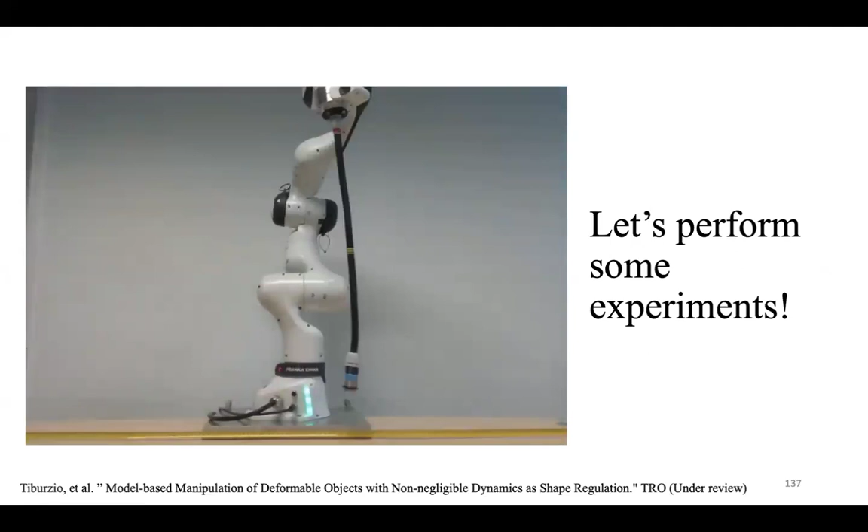And we consider here a quite academic task, but still interesting. So to position the end effector, so the end of the soft part. So you want to position this kind of plug part, so this last part, in space, so position and orientation, and you end up computing the statics and then closing a collocated control loop to end up with this point in

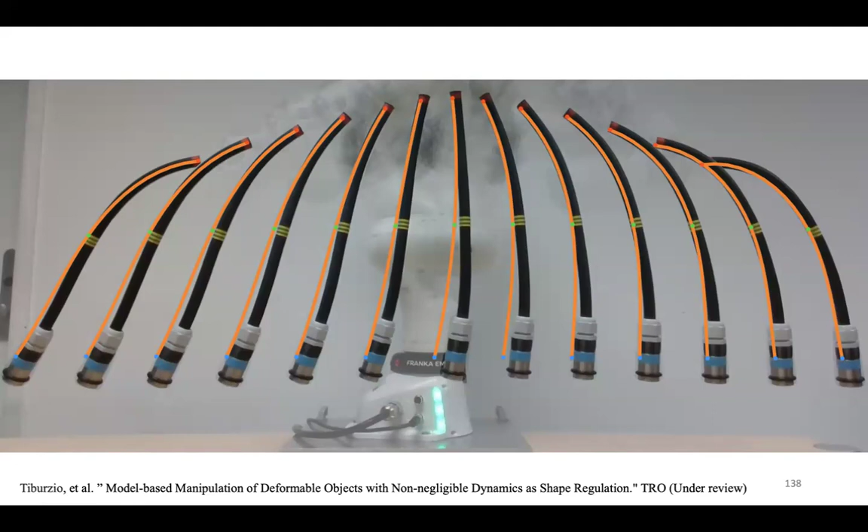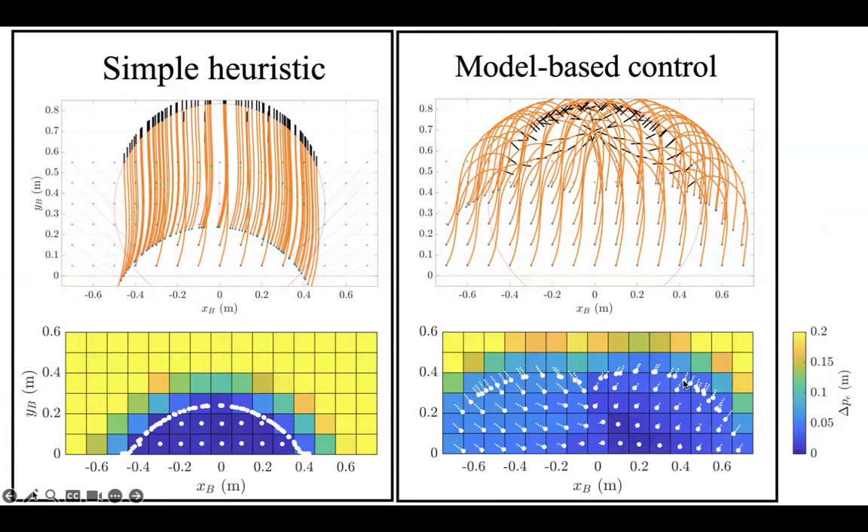some position and orientation. Yeah, and this is the comparison between the expected performance from the model and the real one for several desired locations. And in general, compared to a vanilla strategy, in which you just move the thing to go on top, you get a dramatically improved performance by doing this kind of model-based closed loop version. I think this is quite evident if you start doing things like this.

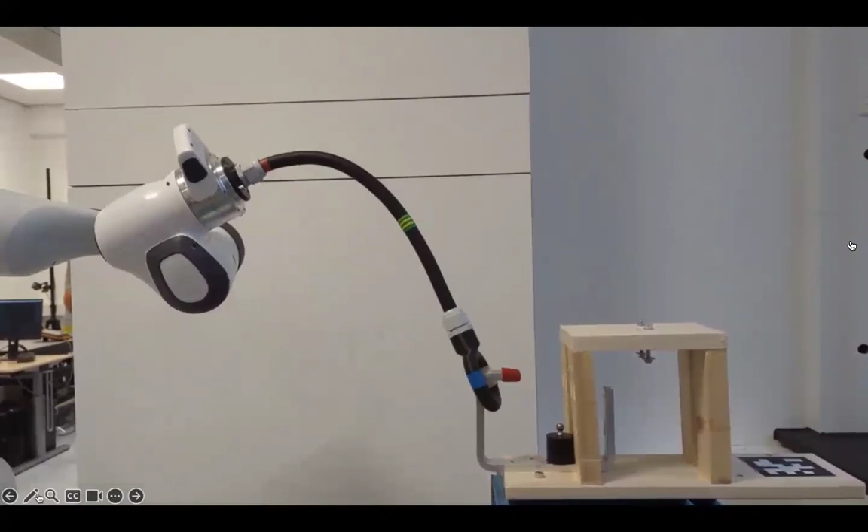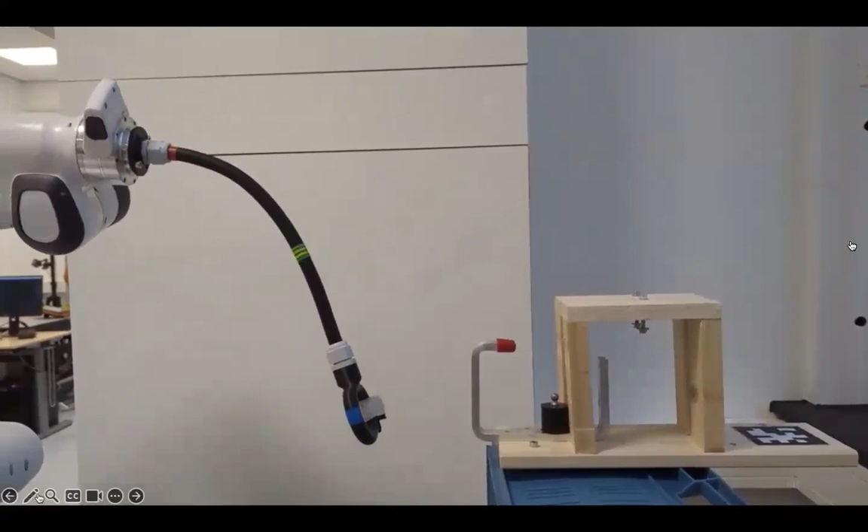For example, here we are trying to position this connector in the same position in space but different orientation, and then you end up with this kind of nice behavior in the end. And yeah, this is just simple, not really meaningful from an application perspective, but I think an interesting other kind of capability that you can obtain. So very precisely move and put this hook into this circle.

So this is a paper, if you want to take a look at it, it's online. And this is now really it. 7 minutes late, and these are the people that are actually doing the work that I got to present. So a big thanks to them, and a big thanks to you for attending.

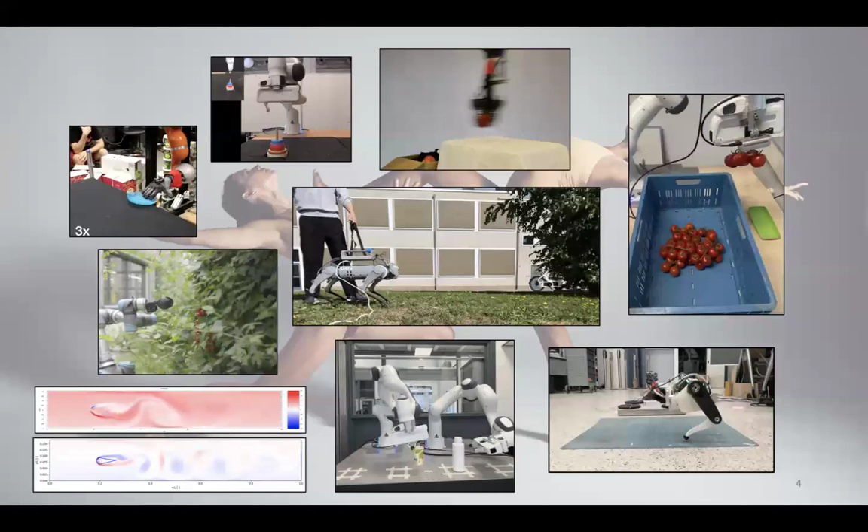And so what we do is that we then design some kind of controller that excites this natural oscillation of the system, and then it's just the actual physics. So you can see it's quite a nice, compliant jump that is obtained.

And this we started to do, or I was doing, for articulated systems, because it was clear what it meant to solve this task. But hopefully some of the things that I presented can be used in a more general context to do similar things for soft robots.

Yeah, that's great. That's a great line of research. It's really nice that soft robots could be a nice test bench for these new approaches that try to mix design and operation, right? Yes. Very nice. Thank you.

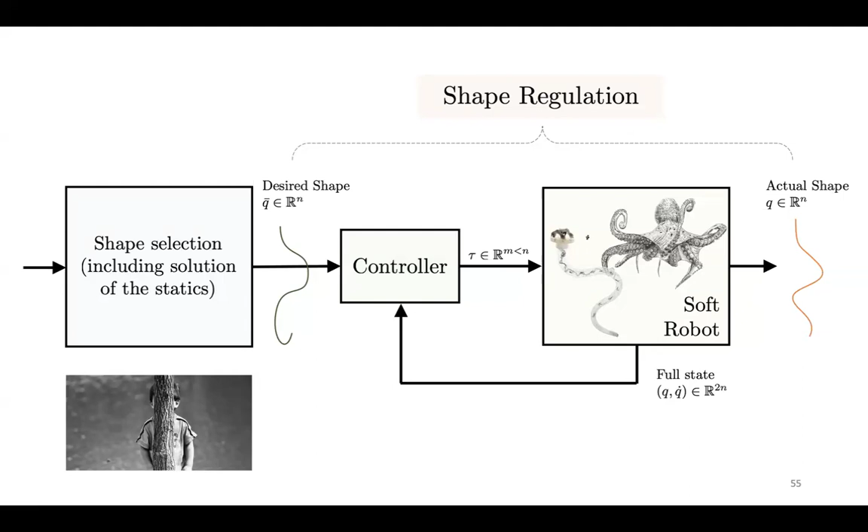And the answer is that I don't know in the general case, because formally proving what will happen is something we still have to do. It's something on our list for the future. But in general, I expect, if you have this kind of controller, let's consider this one for example, where you have a PD, then a feed-forward action for the elasticity and a feedback action on the gravity,

I'm quite confident that you can rearrange your proof by just saying, okay, you calculate the other equilibrium, because the equilibrium is not going to be your Q bar, it's going to be something else. Let's call it Q double bar. And then I would expect a similar condition around this Q double bar to apply in order to get stability.

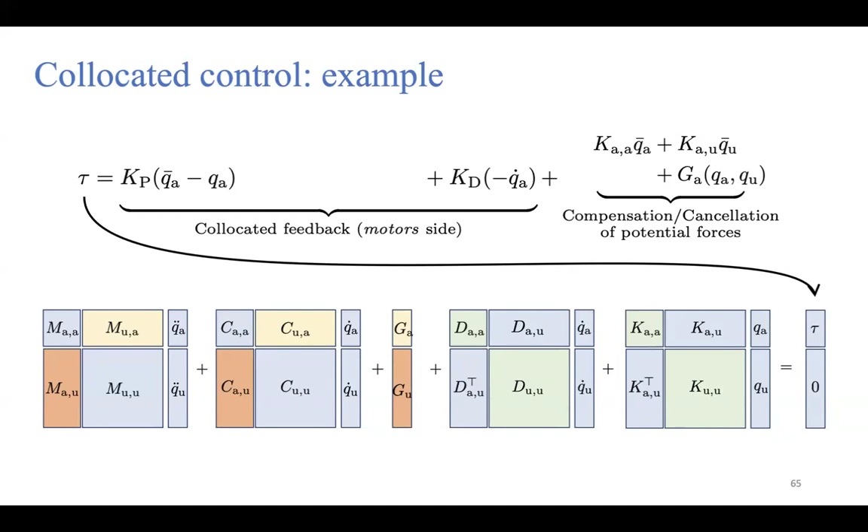So in the end, you will have a similar condition for stability, at least for this kind of controller, but you will have some steady state error, because you cannot get there. Your controller will just try to bring you close to that. This is for this simple controller, but when you start to add integral actions or feedback actions on the elasticity, then very bad things can happen.

Because, for example, for the integral part, you will never be in a condition in which this difference is zero, so this will go to infinity. So, long story short, it's one of the next steps that we would like to look into. So that's a very good question.

May I have a follow-up question? In your answer, you also said if we have m degrees of input, then the assignable set may be an m-dimensional manifold, right? Is it a theoretical result, or a hypothesis? It's a theoretical result, but it's unpublished. Oh. Okay.

But it's not unpublished in the sense that it can be shown quite easily if you put yourself in this actuated coordinates scenario. I've just never written it down explicitly. It's going to be in a paper that I'm writing, but it's not available now. It's a direct application of the implicit function theorem. Okay, I'll look forward to seeing that.